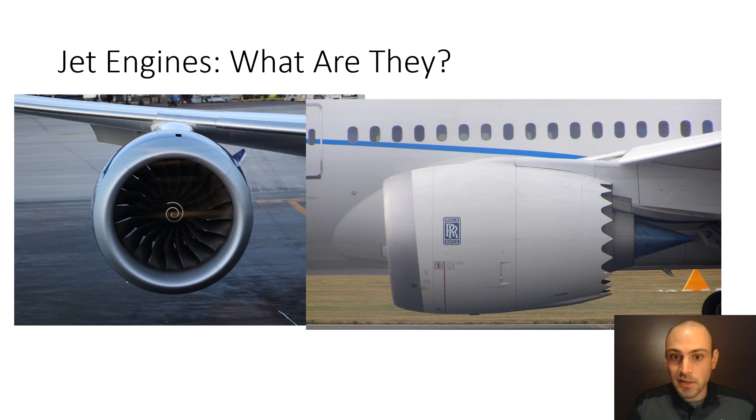Let's look at a cross section of this engine. Looking at it like this picture on the left, we're just going to cut the thing in half. Out front you have the big fan, and then behind it you have fans and fans and fans and fans - a whole bunch of rows of fans. What they do is take the air, compress it, squeeze it, and heat it up. So you've got this compressed, squeezed air all squished together. You add jet fuel into it, and boom, you light it up - you explode it.

So you can imagine exploding it pushes the air out really, really fast, which is exactly what you want. But you can actually make the whole thing more efficient by harnessing some of the power of that explosion and using it to spin a fan.

So out front, you have fans pushing stuff in. After the explosion, you have turbines, which are kind of like fans in reverse. Fans use energy to make air go fast or compress it, and turbines take fast moving air, like the air right behind the explosion, and they turn it into rotational energy, which powers our fan, which is really what pushes the whole plane forward. And the coolest material science, in my opinion, happens right behind the explosion in these high pressure turbine vanes. That is what I get to work on every day, and it's really cool.

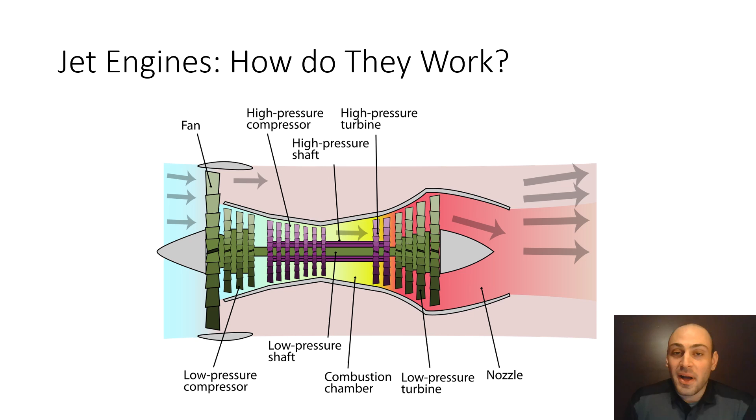Yeah, so the high pressure turbine is really doing the same thing as a windmill. It's taking moving air and turning it into rotational energy. It's just where a windmill might take a nice gentle breeze and turn that into electricity, a jet engine's high pressure turbine takes the power of compressed exploding air and turns that into rotational motion that powers a bigger fan.

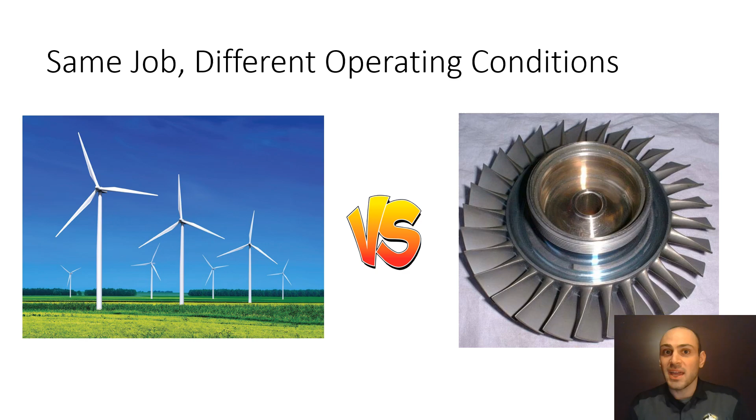So I want you to start to think, let's say you're a material scientist, what are you going to make these high pressure turbine blades out of so that they can survive inside this chamber, inside this jet engine? And with that in mind...

Let's meet some materials. Here's how this is going to work. I'm going to introduce you to a couple different materials, and we will analyze what might make them good for use in a jet turbine, and what characteristics might make other materials not work in a jet turbine.

I'm going to introduce you to 8 different materials, and I want you to pick one, or two, or however many you want. Maybe just pick one, it'll be more fun that way - pick one that you think is a good choice to make a turbine blade out of. We'll look at the most important material properties, and then come to a conclusion on which one is actually the best, and which one gets used in industry today to make high pressure turbine blades.

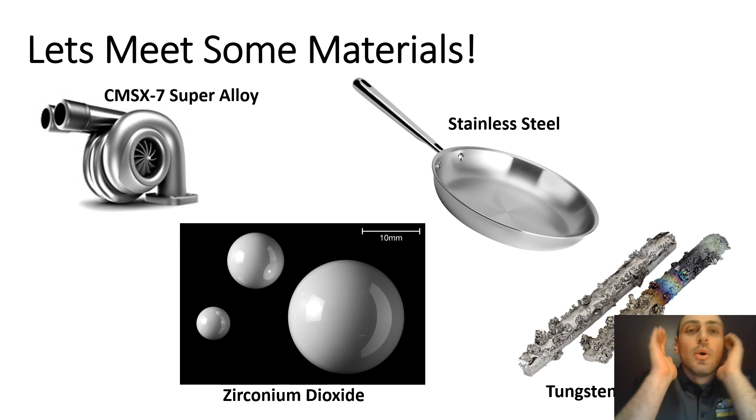I want you to look and pick one that you think will be best. And maybe, when you're picking your material, let's talk about what material properties are important. I've shown you a couple pictures of jet engines, and a lot of them have fire coming out of them, so maybe an important material property is that this material, whatever it is, needs to survive being really hot.

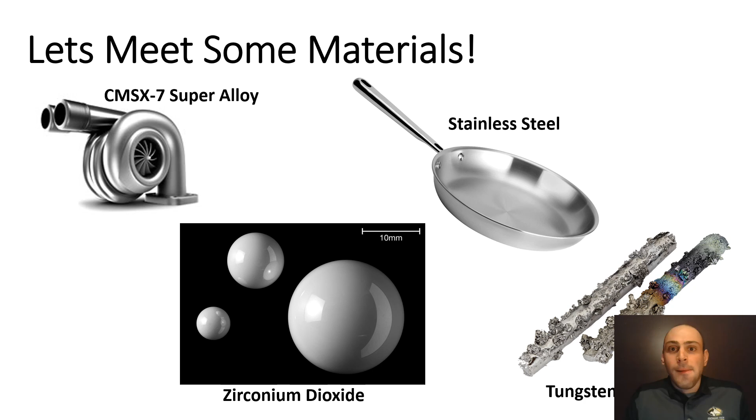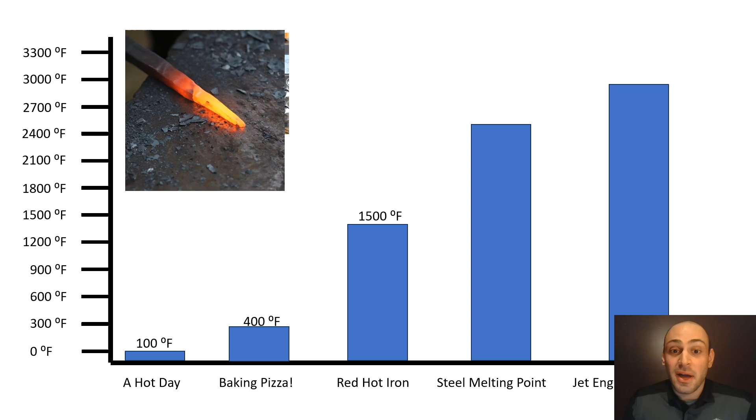So just how hot, right? Well, a hot day is like 100 degrees. Baking pizza is like 400 degrees. Red hot iron, 1500 degrees - now we're getting really hot. Melting point of steel is like 2500.

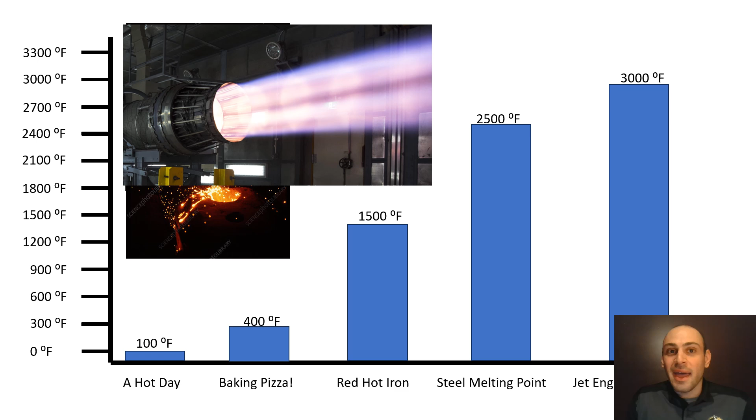A jet engine finally is at like 3000 degrees. That is really, really hot. So our material needs to be able to survive in that kind of environment. So I'm thinking of the materials that I gave you on the previous couple slides. I hope none of you picked ice, because I don't know if that one's going to hold up to 3000 degrees. Let's look at how some of the different materials stack up here.

We're going to look at their melting points. At a minimum, you'd hope that these materials would be able to not melt in the environment that they operate in. Yep, ice, not looking so good, melts at 32. And tungsten, holy cow, that's like over 6,000 degrees Fahrenheit to get that to melt. That's incredible.

Actually, all of these are doing okay. I know the scale makes them look a lot smaller than tungsten, but even aluminum is 1200 degrees. The superalloy and stainless steel are both over 2000 degrees, they're getting close. And the ceramic, the zirconium dioxide, is really high as well.

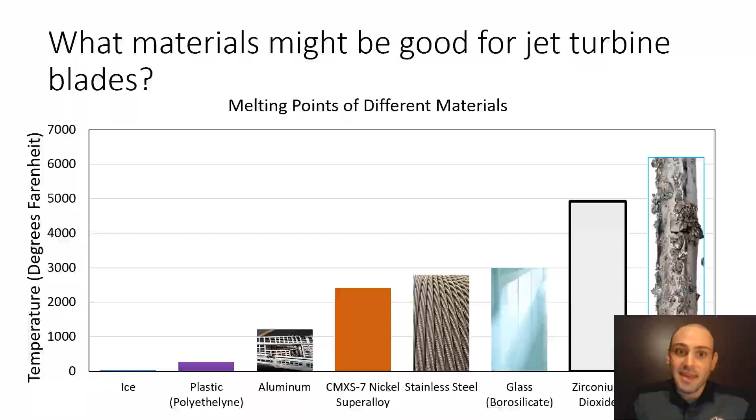So I'm going to score each of the materials we talked about based on my not quite scientific, but directionally correct understanding of how suitable they are for that material characteristic. For example, tungsten gets a 10 out of 10 because it can handle 3000 degrees with ease. Ice, not so much.

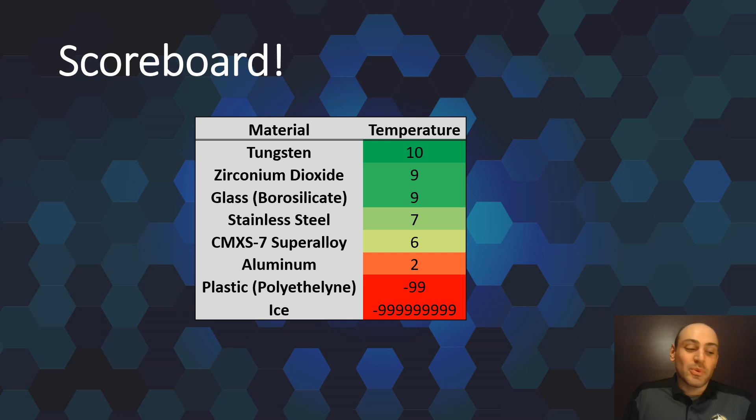But I wonder, there is something about this that worries me for the prospects of using tungsten in a jet engine. You see how in a light bulb we put the glass around the tungsten filament? Why would we do that? Now you might think, okay, that's to protect some bumbo like myself from being clumsy and knocking into it and burning myself on the white hot tungsten filament, and you'd be partly right, but that's not actually the main reason that we have to put glass around tungsten filaments when we use them in light bulbs.

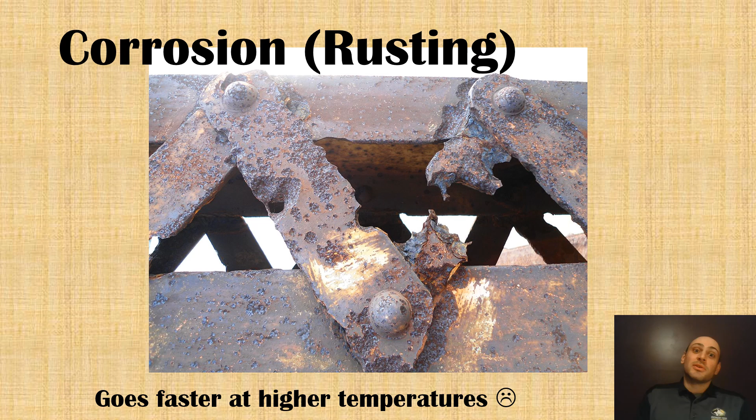Certain materials are a lot better at withstanding corrosion than others, and unfortunately tungsten is not particularly good at withstanding corrosion, at least not at the temperatures that we need it to operate at on the inside of a jet engine. So with corrosion in mind, let's update our scoreboard.

You can see, so the ceramics, one of their interesting properties is they're actually really good at resisting corrosion. They've basically already been rusted, they've already been attacked by oxygen. They're going to react, they're already as corroded as they're ever going to be, so we don't need to worry about them degrading when they get corroded more. They can't corrode more. Tungsten, unfortunately, doesn't do so well, but a lot of our other ones are at least doing okay in terms of corrosion resistance.

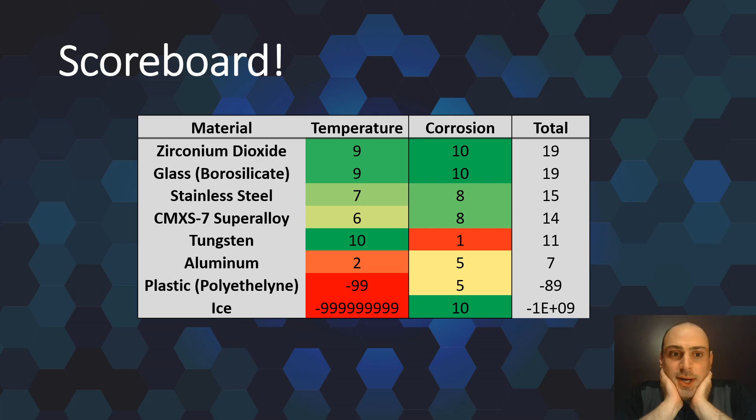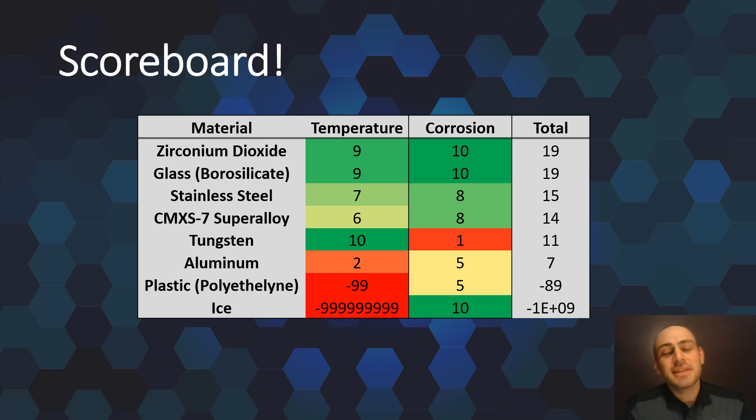But I'm looking now at our scoreboard, and we have temperature, which we talked about, needs to be temperature resistant to operate inside a jet engine. Also needs to be corrosion resistant. And up at the top of the scoreboard so far, we have glass, which I don't know. Is glass going to be a good material to put inside of a jet engine? I mean, what could go wrong, right?

Well, you might know if you've thrown a baseball that didn't go quite where you intended it, that glass is not particularly tough. It can actually shatter and explode. It doesn't take a lot of energy to break it. So let's talk about another material property, toughness. Toughness is the ability of a material to withstand shock loading without fracture. Materials that are very tough generally are hard, but they're also, and this is important, when something's tough, it's bendy.

To actually break something, a lot of metals and glass take the same amount of force, but the thing is, when you deform a metal, it just kind of dents a little bit, whereas something like glass will catastrophically fracture and break into pieces. So ductility is how bendy something is. It helps to be a little bit bendy because then you can absorb some energy when something bad happens.

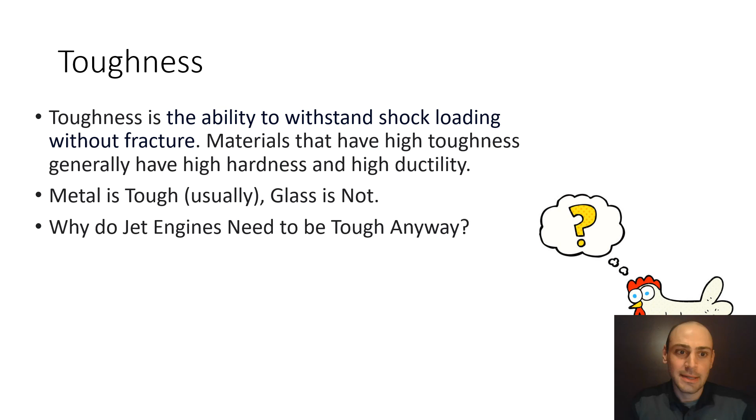But is this really an important property for jet engines? What could go wrong inside a jet engine where a turbine blade is going to get whacked by something? That's what the chicken's wondering. So let's watch another quick video here.

All right, we don't need to watch it again.

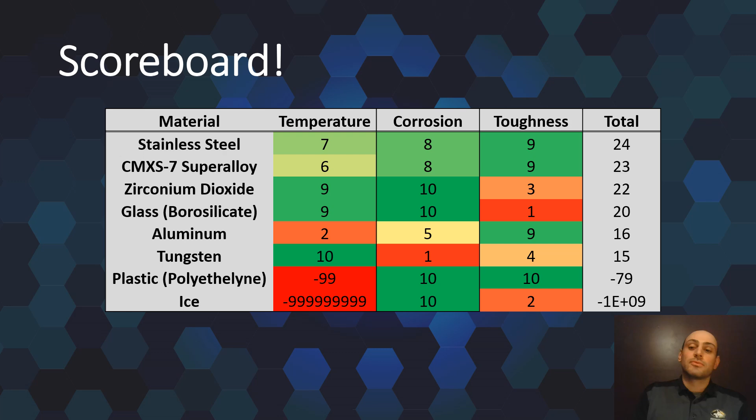So we've looked at temperature, corrosion, and toughness so far. Is there any other material property that might be important for surviving inside a jet engine as a rotating turbine blade? Let's watch another video while you think about that question.

Okay, wow. So the edge of that CD was spinning at over 300 miles an hour when it blew apart. How fast do jet engines spin?

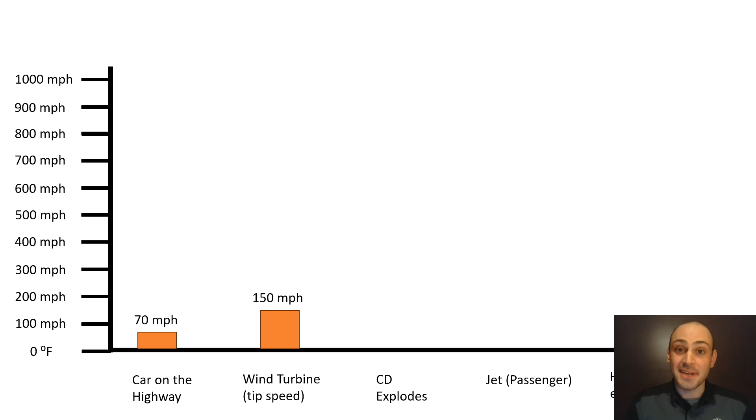So here's a speed comparison. A car on the highway might go about 70 miles an hour if you're following the speed limit. A wind turbine actually spins pretty fast - the tip goes at 150 miles an hour. The CD exploded, as we just saw, at about 300 miles an hour. A plane itself, not the engine, moves through the air at about 500 miles an hour. And finally, our jet engine - at the tip of those fan blades, they need to be able to rotate at 870 miles an hour. That's really, really fast.

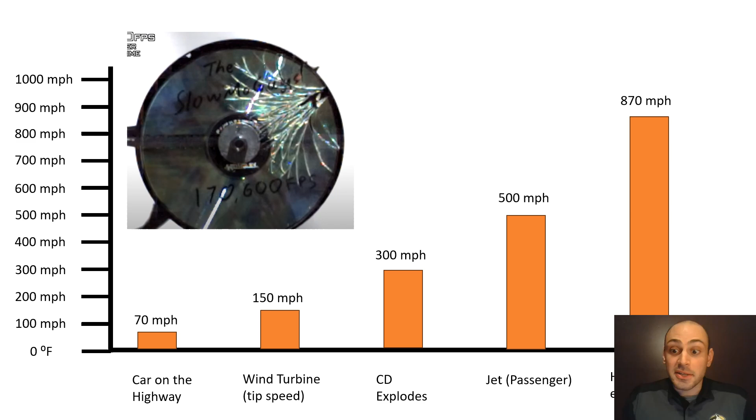And the challenge this introduces for material scientists trying to pick a material to spin that fast is that materials tend to want to explode, fly apart when you spin them really fast. It's why, if you're ever on a merry-go-round, you feel forced to the outside, like you want to fly apart. So the material, whichever one we choose, needs to be able to hold itself together well - it needs to be really strong to not explode like that CD we just watched.

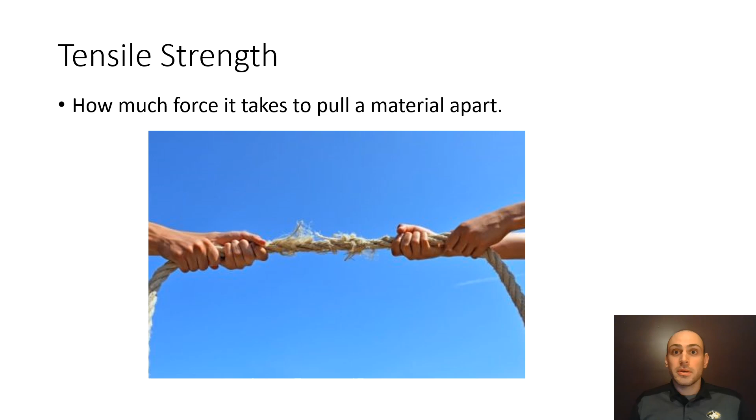So this is a material property we call tensile strength, and it's basically how much force it takes to pull a material apart. Here are all of our materials with their tensile strength plotted out. And oh man, look at tungsten again - it's really too bad that it corrodes at high temperatures, because it would make a great material otherwise.

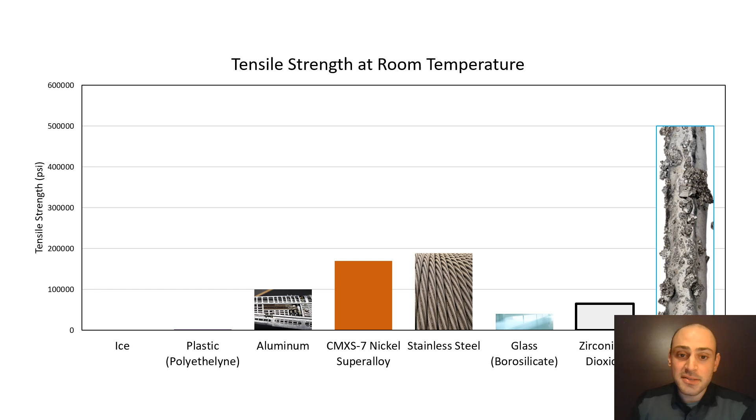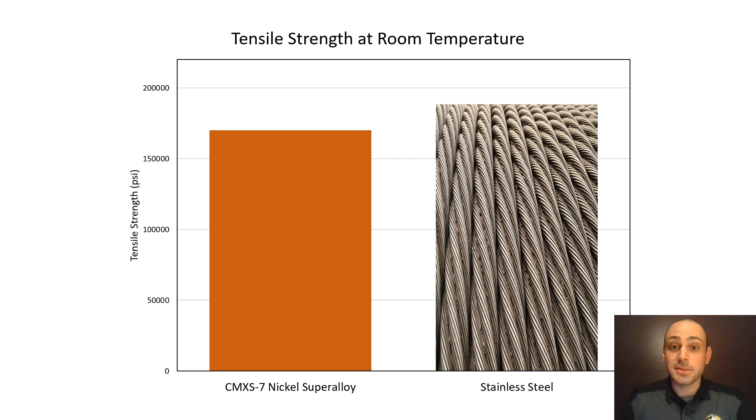So let's ignore that and focus on our next two strongest materials - I want to zoom in on those. Our next two strongest materials are nickel superalloy and stainless steel, and it looks like stainless steel is a little bit stronger. So yeah, that's awesome - let's use that for our jet engines.

But I have a nagging feeling. Did I make a mistake? Tensile strength, PSI, pounds per square inch. Tensile strength at room temperature, stainless steel. What's my mistake? I know what it is.

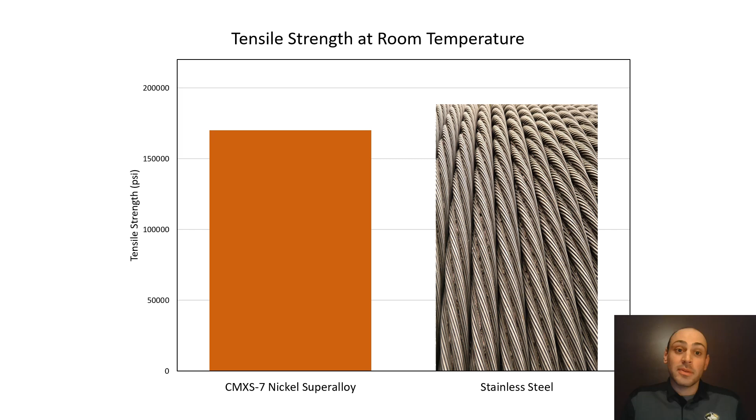So this is tensile strength at room temperature. Our materials, if we're using them inside a jet engine that's up to 3,000 degrees, they're not at room temperature. They're very, very hot. So we don't want to look at tensile strength at room temperature. We want to look at tensile strength closer to the temperature range that these materials actually operate at.

Ooh, wow, that's a big difference. So the first chart was tensile strength at room temperature. This one is tensile strength at 1,500 degrees Fahrenheit, which is closer to what the fan blades are actually going to operate at inside an engine. And you can see that stainless steel was stronger at room temperature, but it loses almost all of its strength when you go up to 1,500 degrees Fahrenheit. Whereas nickel superalloy actually gets a little bit stronger when you get it that hot.

And that's weird, it's actually very unusual. What stainless steel is doing is very common among materials. When you heat stuff up really, really hot, it tends to get kind of Play-Doh-y, and it can stretch out, it's not as strong anymore. Superalloys are called superalloys because they're one of a very select group of materials that actually get stronger as they get hotter, and they can operate very close to their ultimate melting point, which is really cool.

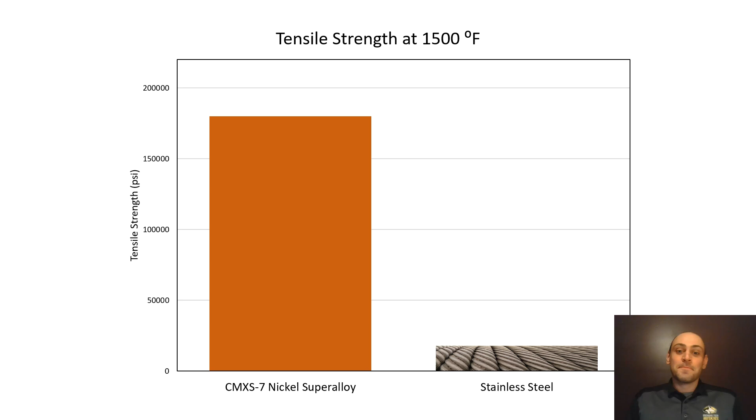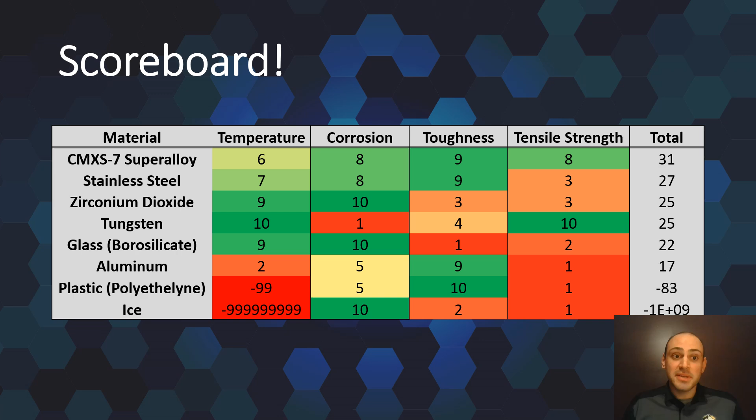So let's update our scoreboard one more time, taking into account tensile strength. And it looks like the nickel superalloy, CMSX-7, is on top with 31 points.

So what material do we use to make jet turbine blades? Well, modern jet turbine blades are usually made from nickel-based superalloys like CMSX-7. CMSX-7 is a particular formulation of nickel superalloy.

Yeah, so I'm thinking back though to the one material property that superalloy wasn't at the very top of the chart for, which was temperature resistance. We need to operate up to 3,000 degrees Fahrenheit, and nickel-based superalloys, even though they're very strong close to their melting point, will melt eventually, and they melt under 3,000 degrees Fahrenheit. So is there anything we could do to try to prevent that?

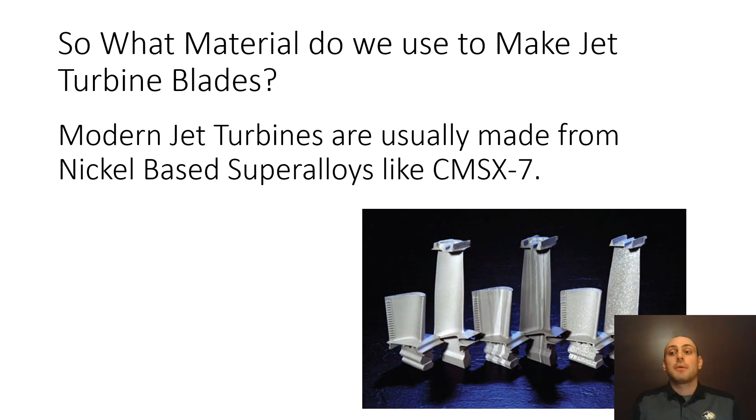I wonder. Well, you might remember that our toilet bowl material, the ceramic, was very good for corrosion resistance. It was very good at temperature resistance. The only problem was that it tended to shatter a little bit. It wasn't particularly tough. But why don't we let the nickel superalloy be the backbone of our blade, and we'll just cover it with a thin coating of the zirconium dioxide, the ceramic toilet bowl material, that will help protect it from the extreme temperatures.

And this is what's actually done in the hottest part of modern jet engines. You use the nickel superalloy as the core, and you might put some protective coatings on it that help with the temperature resistance.

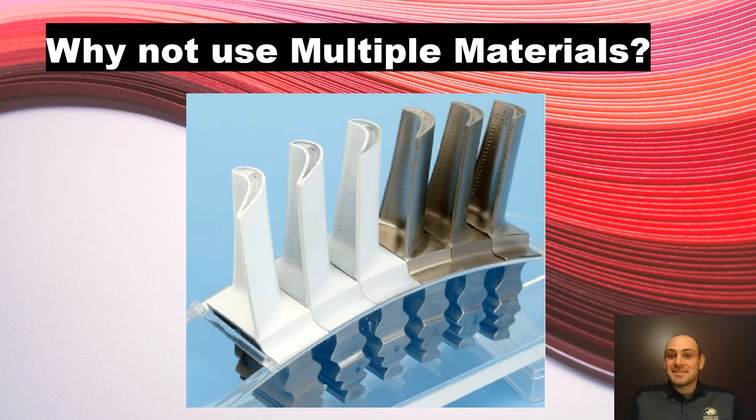And here's a picture of them. This is what I make every day, and it's kind of fun to talk to you guys all about it. So that concludes my presentation.